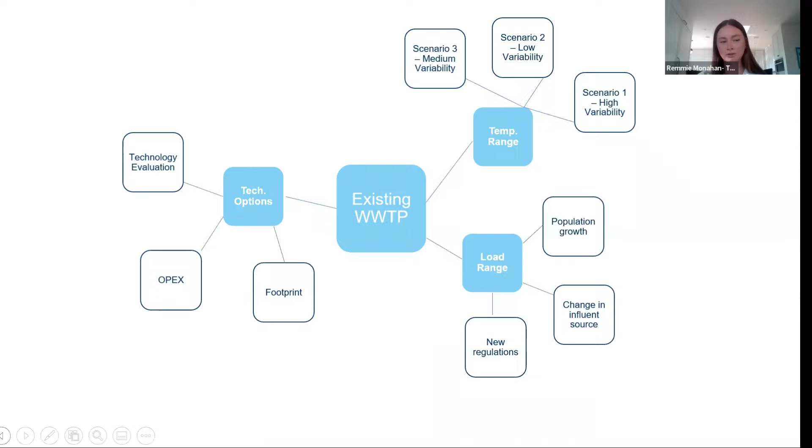But when you look at these even further, when it comes to something like population growth, there are more scenarios. And like I said, there's not enough time, not enough budget to evaluate every single one of these. But if we want to start designing these for a sustainable future, it's really critical that we start to take these into consideration today. So Transcend allows you in a matter of hours to run all these different scenarios in order to then compare and meet your treatment plant goals.

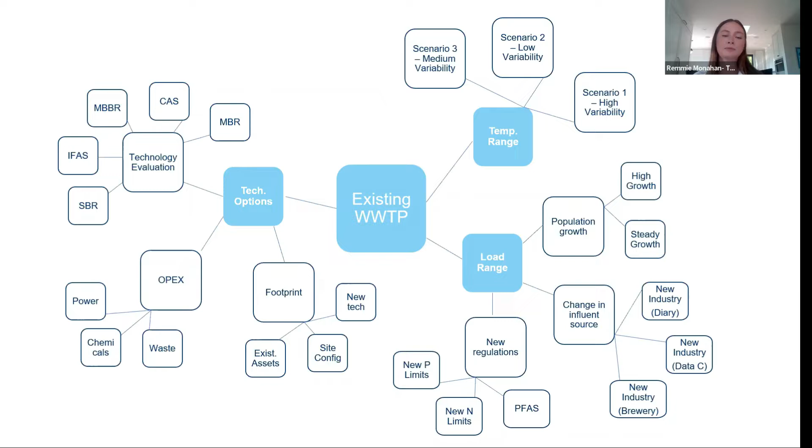So I'm going to kick this now over to Rudi Botha, who is one of our process engineers, and she is going to share with you our tool, give a quick demo, which displays how you can actually run these different evaluations for your treatment plant.

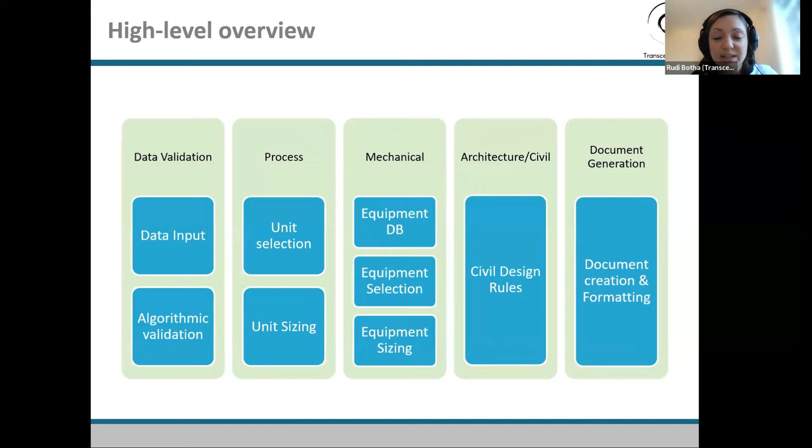Okay, we'll go ahead. Just stop me if there are any questions, or feel free to post them in the chat as we go. So I just wanted to focus on this element of flow variation, as we've spoken about in terms of climate change.

So what is actually going into our wastewater treatment works? Well, this is just a simplification really. We have domestic wastewater, and it varies during the day. So we have this diurnal flow pattern you may be familiar with, and it's quite important to take these peaks into consideration in our designs of wastewater treatment works, for hydraulic purposes of sizing hydraulic units, but also for the aeration demands in the biological systems, if we are using aeration.

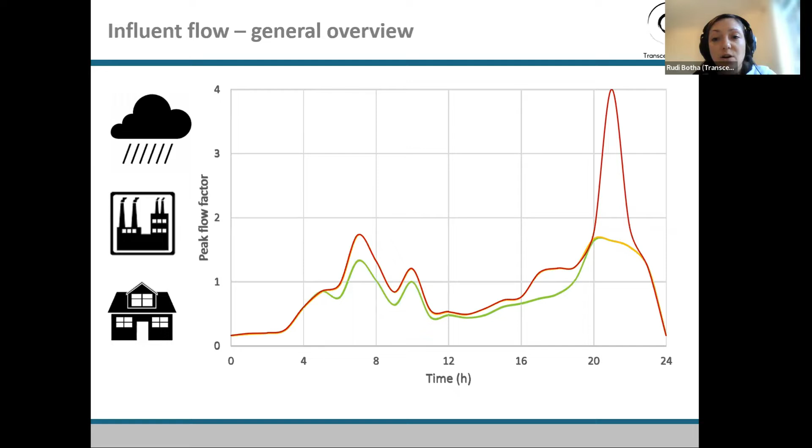And to accommodate those peak amounts, we need to size the equipment to handle that peak. So in domestic wastewater, there may not be significant peaks in a large population, but as we add industrial flows, there may be different peaks overlapping, causing even larger peaks. And then there's also rainfall that can ingress into the sewers. As we spoke about in terms of climate change, we're seeing these rainfall events getting more severe in shorter periods, so we have higher rainfall in a short amount of time. That makes our peak much higher, and we need to start thinking about that in our designs.

So how does the design generator take those peak flows into account? Well, we have many options for you to provide this data. We base a large amount of the design on the design average flow rate, so this is what you choose to design your plant for. Maybe you've projected into the future that you will need a 200 megaliter per day plant. That's our maximum at the moment, but we are looking at expanding it.

You can insert that as your design average flow. So we use that to size the biological system, and produce OPEX results - how much sludge you'll have to dispose of, how much airflow you'll use on average. But then the important thing here is the peak flows. We provide so many different options because everybody has different data. So if you have the peak weekly flow, peak daily flow, or peak hourly flow, you can put that in and we can use it. We provide a space for two different peaks, essentially.

One is for your dry weather - that's when it's not raining - and that influences the wastewater treatment works on a daily basis. So that's what we call peak dry weather flow, and we use that to create the diurnal flow pattern we just saw, as well as to size the blowers for peak airflow.

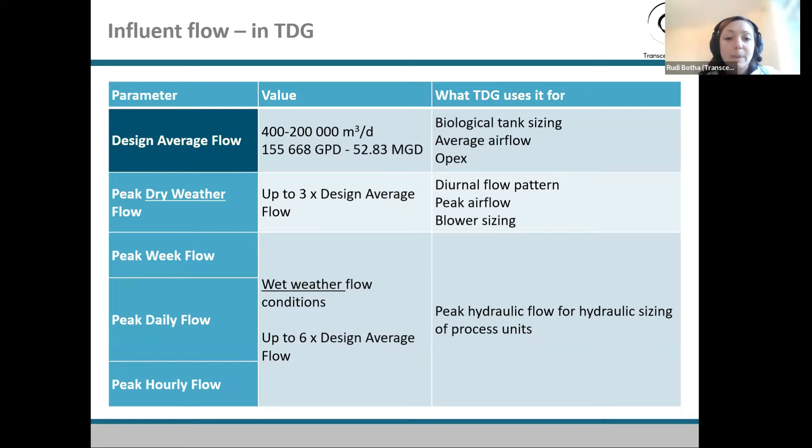As we're working on a preliminary level, sometimes we don't have all of this data. What's great about the design generator is we try to help you out with whatever data you don't have. There are only a few values you have to fill in, and these peak flows are not one of them. If you don't have any peak flow data, that's all right - we take an estimate of your biological oxygen demand in the influent and your average design flow. From a large flow we can estimate you may be accommodating a high population, with lower peaks, or if you have a very small flow, a small population, therefore quite high peaks.

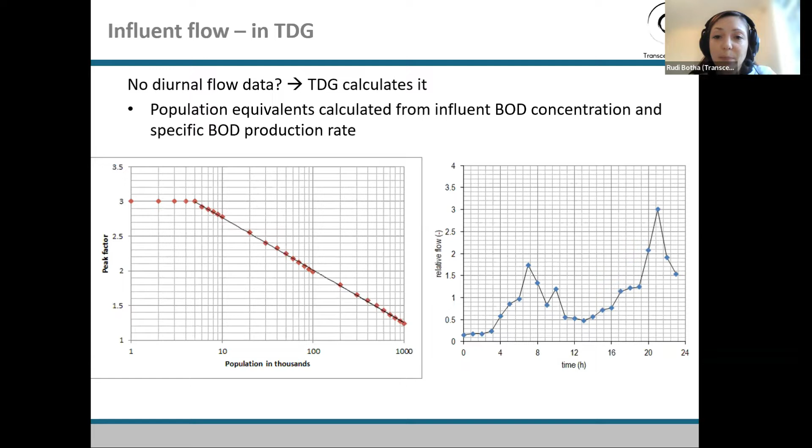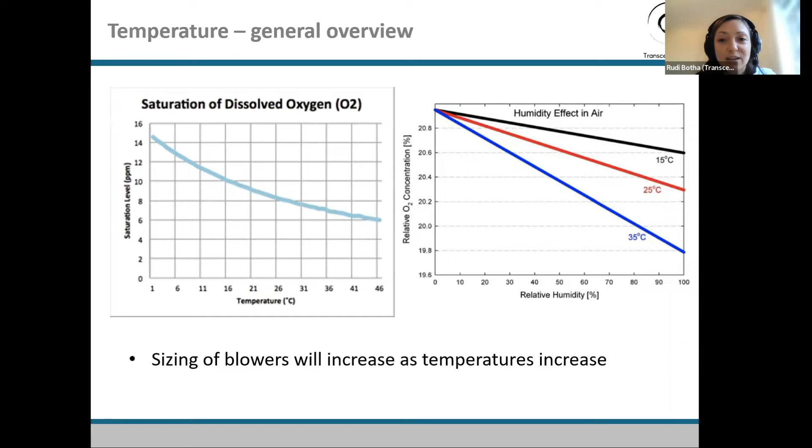So that was just a bit of background on the technical elements I'm going to highlight in the model. There's a lot in the model, so it's difficult to touch on it all, but as we're focusing on climate change today, I thought I'd mention these in particular.

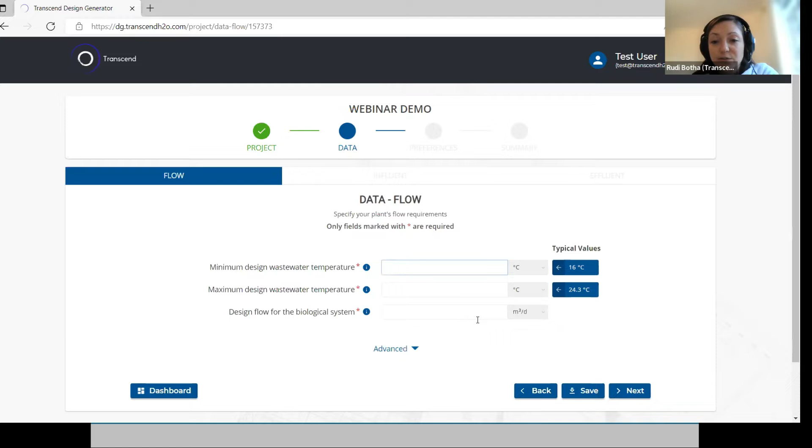So the next item here is your input data. We have flow, influent, and effluent inputs. With the flows, we only have to include temperatures and average flow. But if there is interest in exploring peak flows, as we've been discussing, here you can really specify. We also provide typical values.

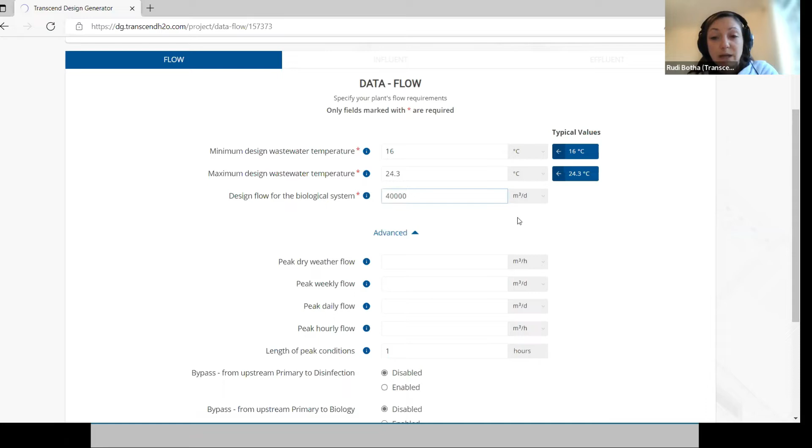These are linked to your region, so these are typical for South Africa, and I'm going to use these values. For our average flow, I'm going to use a plant of, let's say, 40 megaliters per day. Now I can include any peak flows I need. Quite common peak flow is about double the average flow in a diurnal pattern. This is what's common for my area, might be different for yours.

Here we can choose one of the wet flow peaks, so you don't have to include them all. If you do have them all, that's great — whichever one you insert will be used. So let's say, for example, on a rainy day we get quite a lot of rain, and it might be about 4 times your average flow.

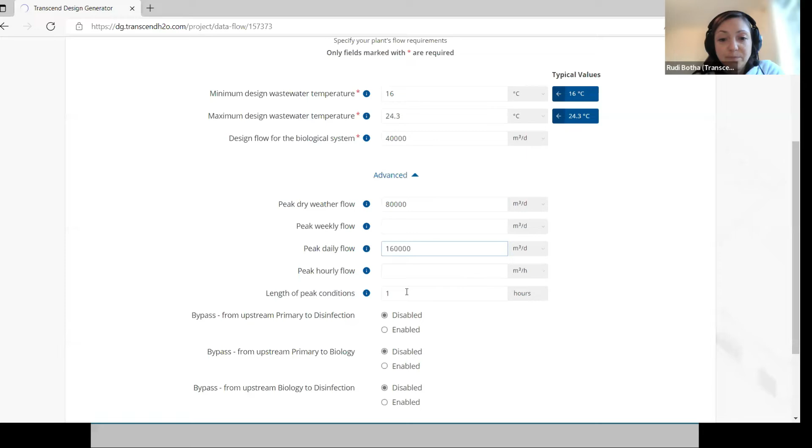Another interesting feature that I'm going to go into more detail on, and it's very helpful in climate events such as high rainfall, is a bypass system. This allows you to bypass your flow from 3 different points in the wastewater treatment works. You might be asking why you'd want to use something like this — well, it's actually used in Cape Town, where I live. One of the wastewater treatment works has been surrounded by city, as it was built a very long time ago, and there's no longer space to expand it.

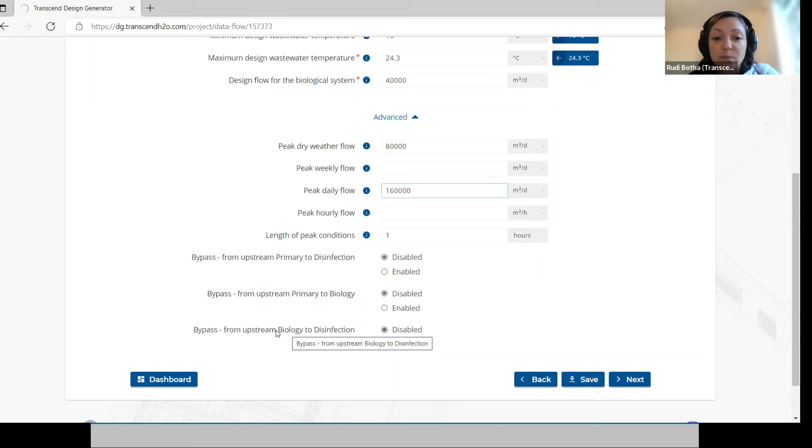So they've created a bypass to a wastewater treatment works further out of the city, where they only use primary treatment and bypass all of the main biology and disinfection, sending the treatment out to a second wastewater treatment works. So this is the example we have here: we're going to send it through primary treatment, but bypass main biology and disinfection.

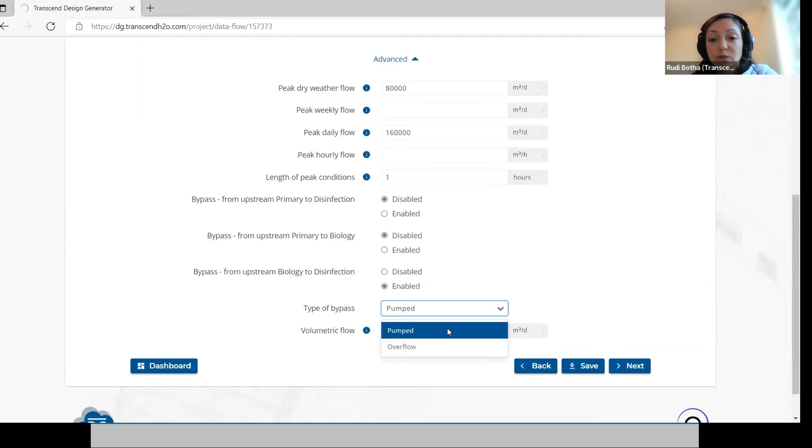I'll include that here. You can use either a pumped bypass or an overflow. If you include pumped, whatever value you put in here will be the fixed value that you're bypassing. If you choose overflow, you'll keep this amount, and anything more than this amount will be bypassed. So let's, for example, use 70 megaliters per day, 70,000 cubics per day, and anything more than that will be bypassed from the secondary to the disinfection.

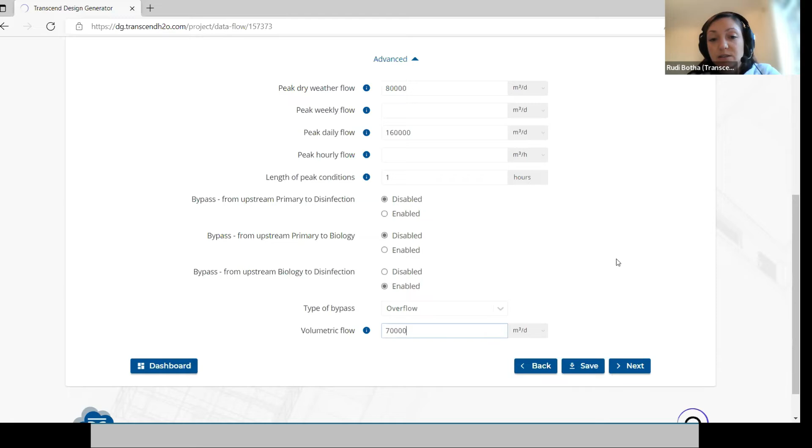Just going to pause a little bit here. This is quite an interesting concept. I don't know if there are any specific questions on this.

We have a question in the chat: from your experience, which is more power consuming for air blowers, in conventional activated sludge or an extended aeration system?

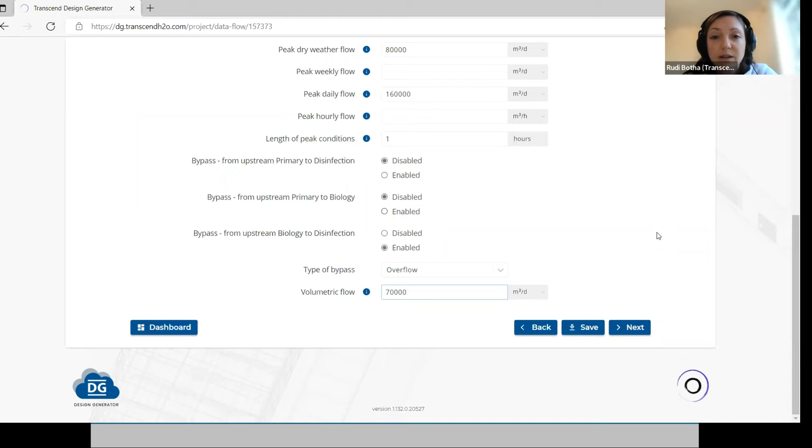I think the extended aeration is likely to use more power. You're using a very long sludge age, so it's breaking down particulate matter that takes a very long time to break down. But we could test it in the system and have a look. It depends on a number of factors—you'd need to compare it, keeping everything else the same. Of course, thank you.

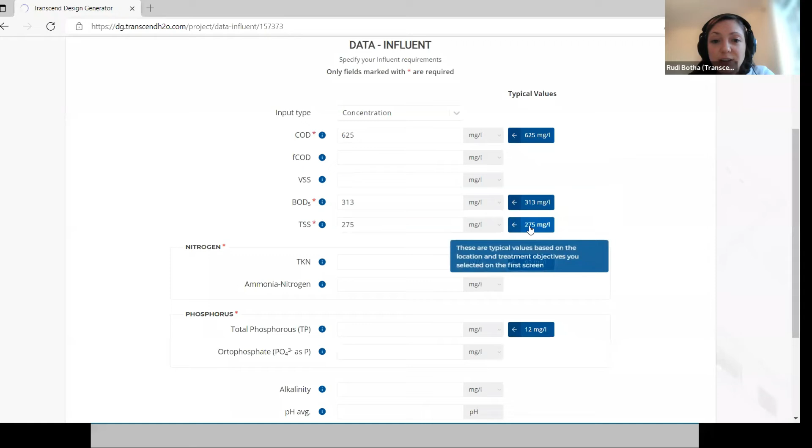So to save those results, I'm clicking next onto the next page here, and here is the influent flow data. The red stars indicate the ones we have to include, and I'm going to use these typical values from the region. Of course, instead of using TKN, you could choose to provide ammonia instead, or as well, if you have the data available. If you don't, we'll create a calculation in the background to estimate it.

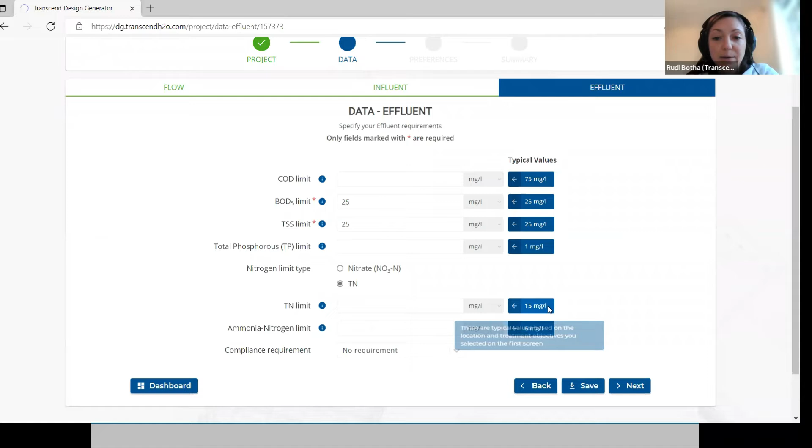Next, we're on to the effluent limits. These required ones I will fill in. If you have more effluent limits you'd like to specify, you can include them—just for example, I'll include the TN as well, and phosphorus. And here you can choose your compliance requirements, so if your compliance is on a monthly average or daily average basis, you can indicate that here.

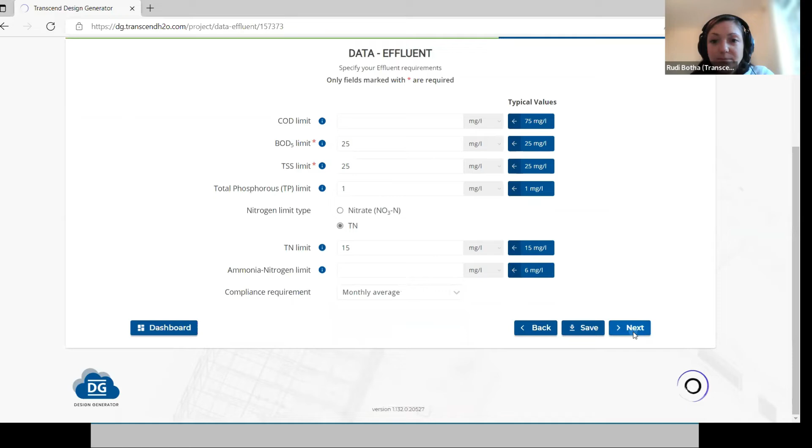Now we go to the preferences. This is where you choose which components of the process you'd like in your treatment plant. There are options to let the calculation decide, for example for grit removal and flow equalization. If you select that option for flow equalization, when there's a very high peak it will provide flow equalization to balance the size of the other downstream units. Or if you specifically want flow equalization, you can override and say, no matter what the peak is, you want flow equalization.

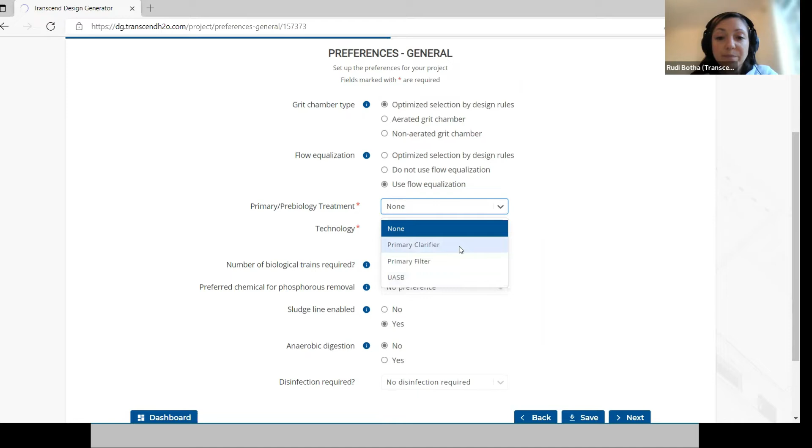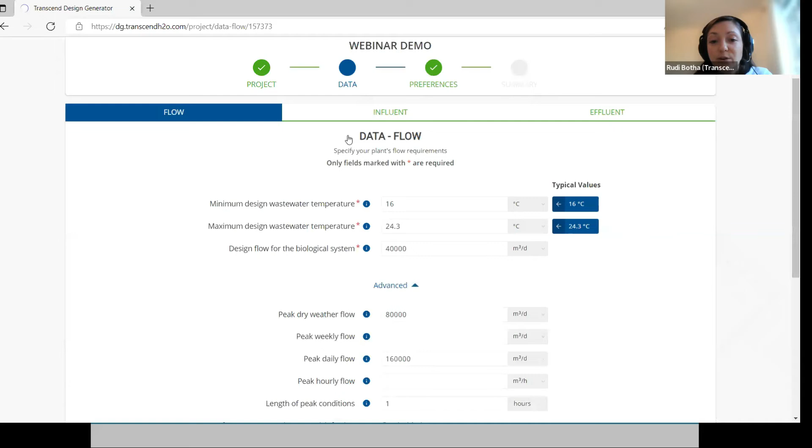You can also choose your primary treatment—there are primary clarifiers, filters, and an upflow anaerobic sludge blanket reactor. For example, I'm just clicking a primary clarifier. The technologies offered here are the CAS and the SBR, and the reason there are only two is because we chose a bypass—the bypass is only available for these two technologies. But if you'd like a different technology, you can always go back. So let's go back to our data and remove our bypass, then remember to click next, as it saves your data.

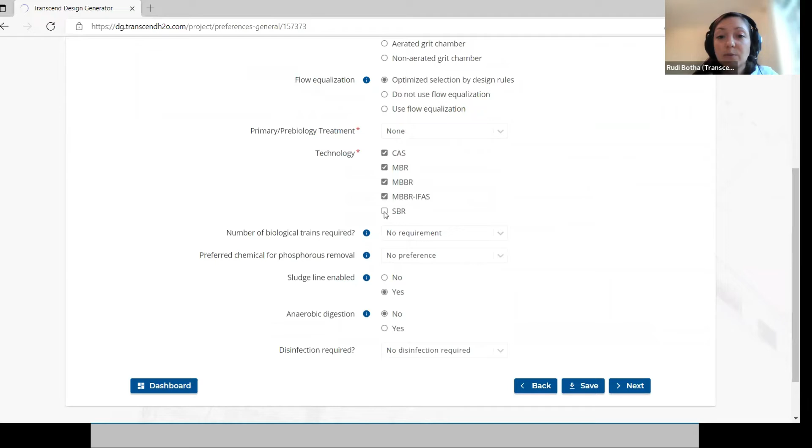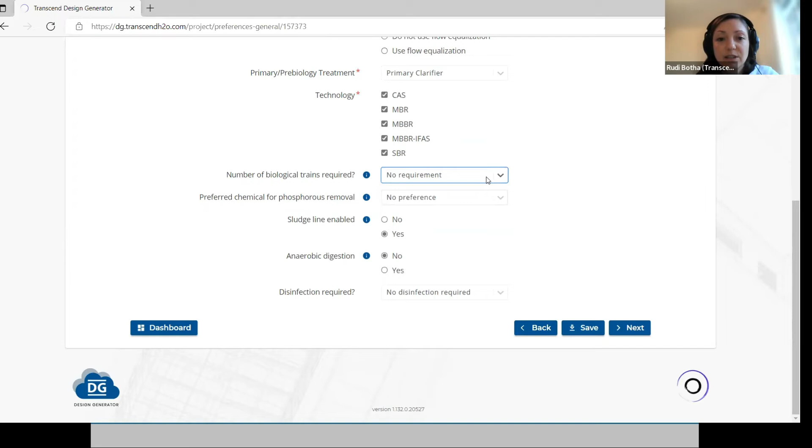We can head back to our preferences, and now you'll see a number of technologies available. You can choose more than one, and they'll produce a set of outputs for each of these main biologies. So we can run the model and compare how it looks with a conventional activated sludge system versus an MBR, MBBR, IFAS, or SBR system. Just reselecting my primary clarifier there. If you have a specific number of trains you'd like for the biology, you can choose that. If you have a preference for chemical removal, you can indicate that, and you can choose whether to include the sludge line, an anaerobic digester, and disinfection.

Are there any questions there, Remy? Yes, one in the chat: since we're focused on climate change today, have you noticed any trend of increasing or decreasing effluent wastewater temperature? I haven't personally, but I think it would be highly likely to occur, especially as our summers get hotter. So I think it's very likely, though I haven't seen any specific examples. Thank you.

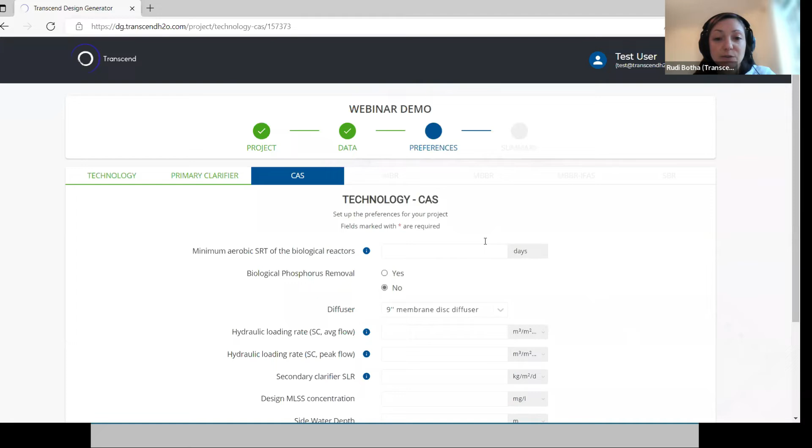So for example, for the activated sludge, we can choose a minimum aerobic sludge retention time. We could also choose whether we'd like biological phosphorus removal, and let's, for example, include that.

We can then also choose a particular configuration—I'm going to choose the UCT configuration, I'm familiar with this one. We can specify some parameters associated with clarifiers, as well as mixed liquor suspended solids concentration, or the side water depth. So if you'd like a really deep reactor or a very shallow one, if you're planning on using surface aeration for example, you can specify that here. So let's, for example, use quite a shallow reactor.

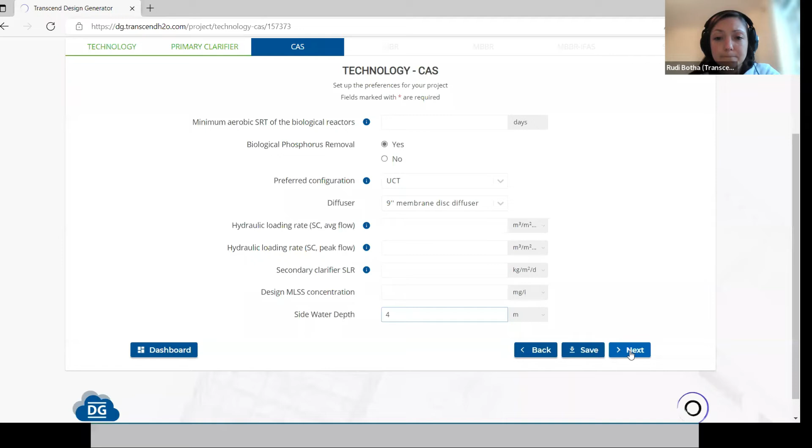The same can be applied for all the different technologies. If you'd like to specify something specific, you can, but most of these inputs are not required, and so you could just click through to use the default values, which are industry standards.

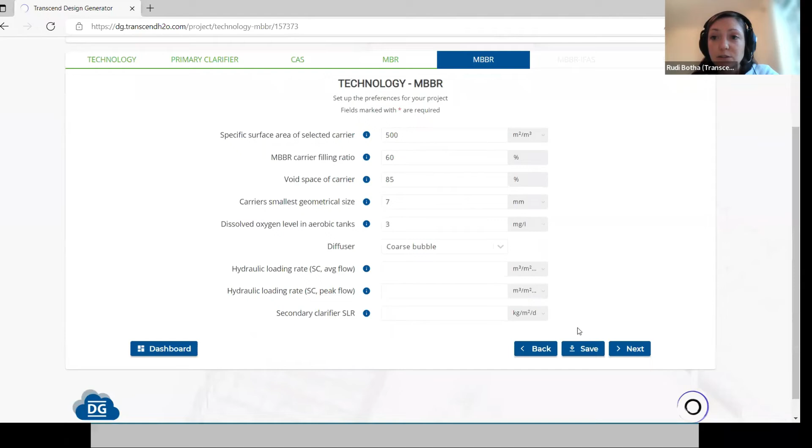And that's it. You've provided your data and chosen your preferences. And then all that's left is to run the design.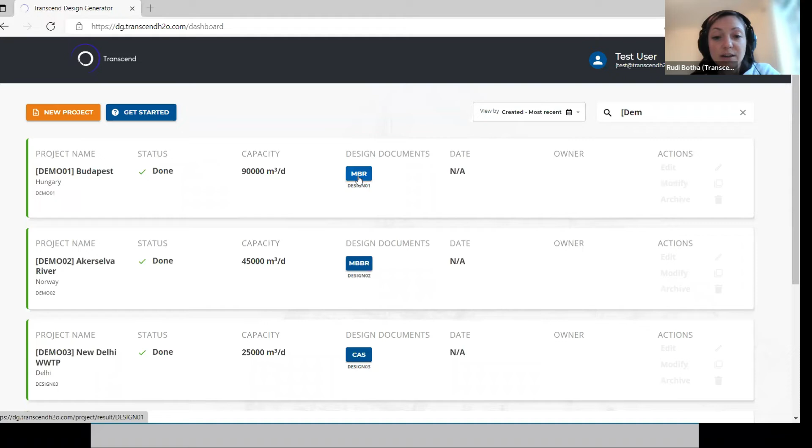So this one's running at the moment, but if we have a look at one that's already finished, it'll look like this blue MBR here, and you would be able to click on this icon and see all the output documents over here, where you can view them in the browser. You can download PDFs, and download editables is also available if you have a subscription.

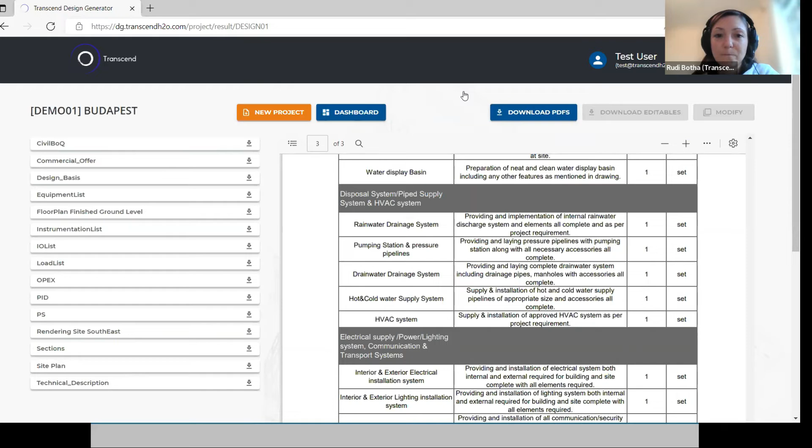So I'm just going to take you through a few of these output documents.

All right, Rudy, as you're pulling those up, we actually have a few questions. Does one have a chance to vary the settling SVI by season to see if the settling is okay throughout the year? Or maybe we have to use the worst case scenario?

So that is varied throughout the year. As I mentioned at the beginning, we do a dynamic simulation as well, and that is varying a couple of values over an entire year or more than a year's simulation. Those values that are varied are the temperature and the SVI. So it is varied throughout the year through the seasons, as would be normal for a seasonal flow.

Thank you. And the other one actually had to do with SVI as well. Hani, please let me know if that answered your question, and then we should be good to go, Rudy. Great.

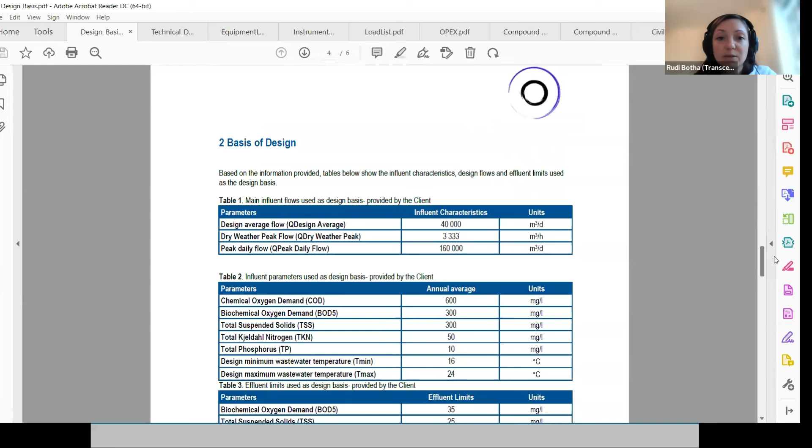So these are some of the output documents that you'll find. The design basis is just a summary of the inputs and assumptions we've made in the model. So these are the influent flows, influent concentrations, effluent parameters, and in the design, if there are any characteristics we didn't include, for example we didn't specify orthophosphate, but that's been calculated in the background, it will then list that here.

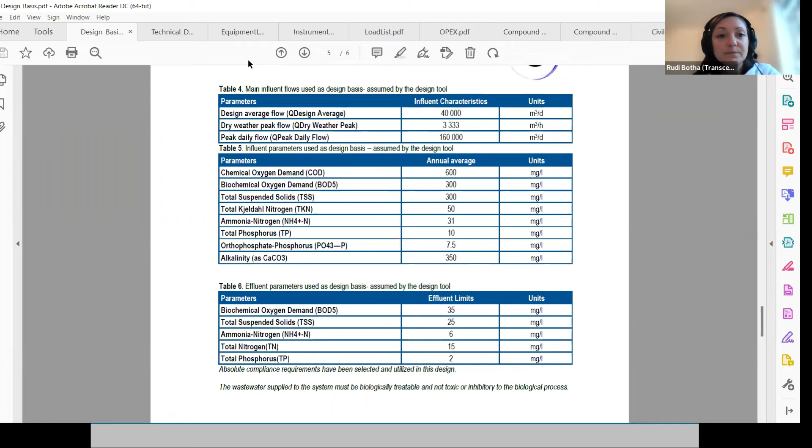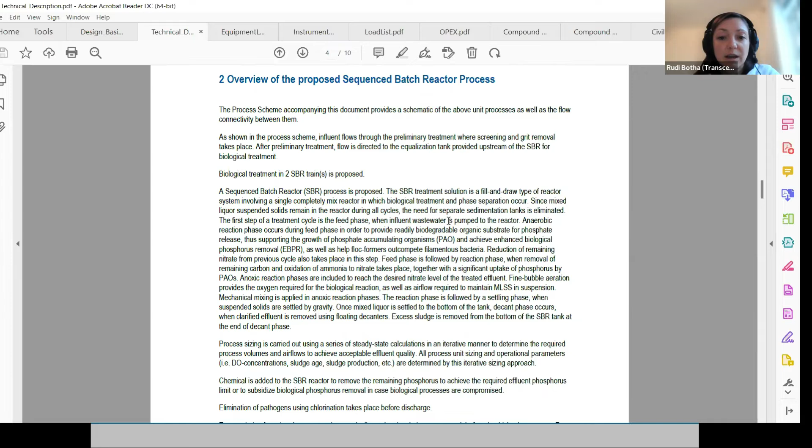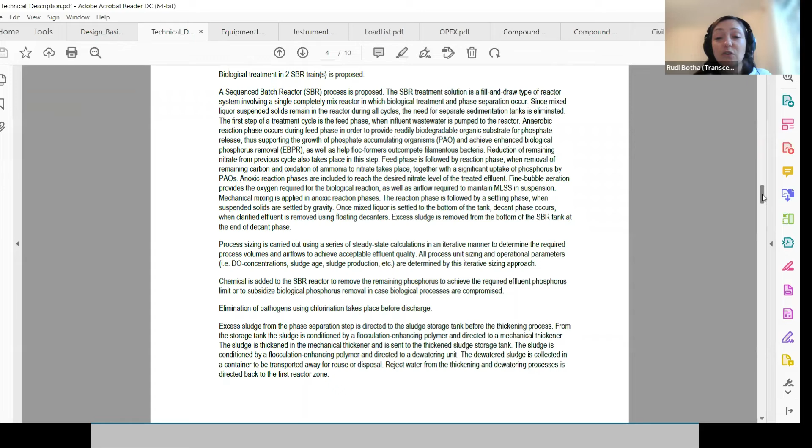And then the next document, the technical description, one of my favorites, is really the comprehensive description of all the preferences we've chosen and the design parameters associated with each process unit. So there's an introduction. It actually gives you a description of where the flow is going, through which process units, if it's being diverted, bypassed, what is happening in the sequencing batch reactor, for example, whether there's biological phosphorus removal, etc. So that's quite a helpful document that you don't then have to, as a process engineer, write for each and every design that you would like to run.

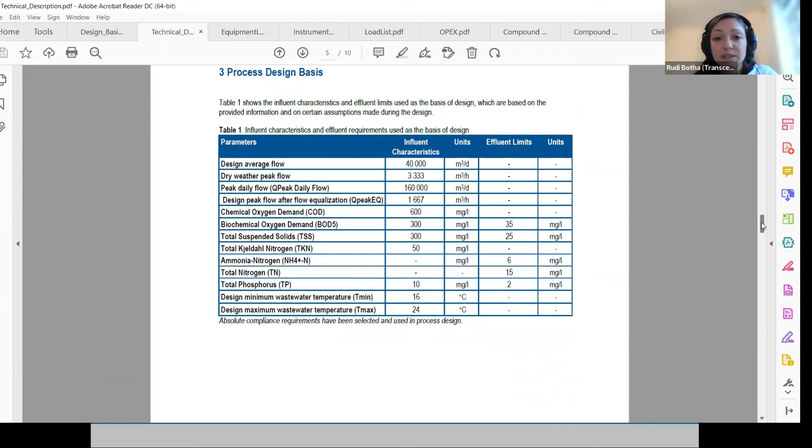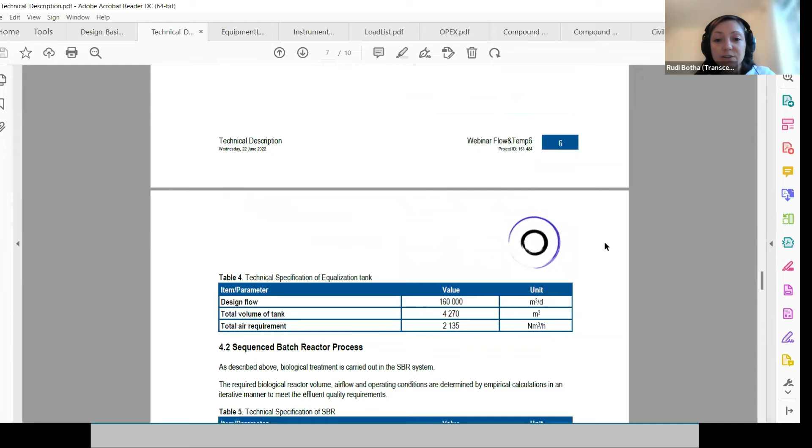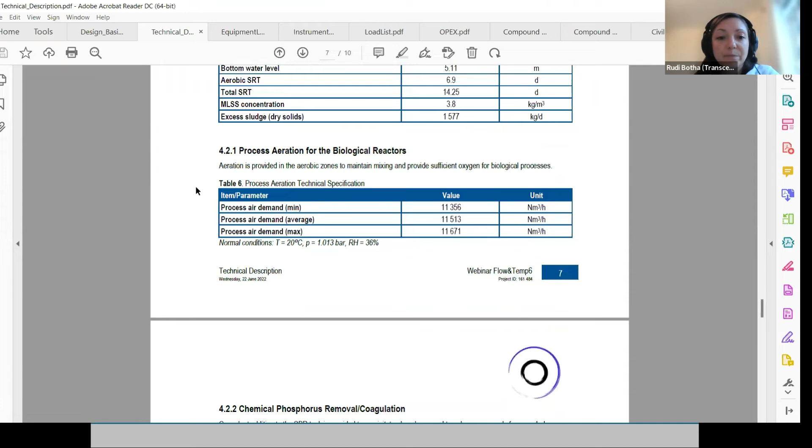There's a quick description, summary of the basis of design, so just influent and effluent limits, and then quite a lot of detail on screening, grit removal, equalization tanks, your reactor and sizing of the reactor, and exactly the flow pattern. For this example, it's a sequencing batch reactor, and the aeration demand, any chemical phosphorus removal, disinfection, sludge management. The whole design of the plant is listed here.

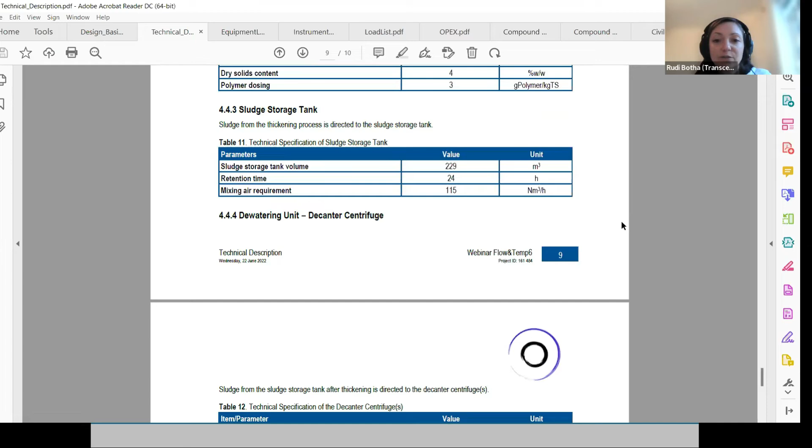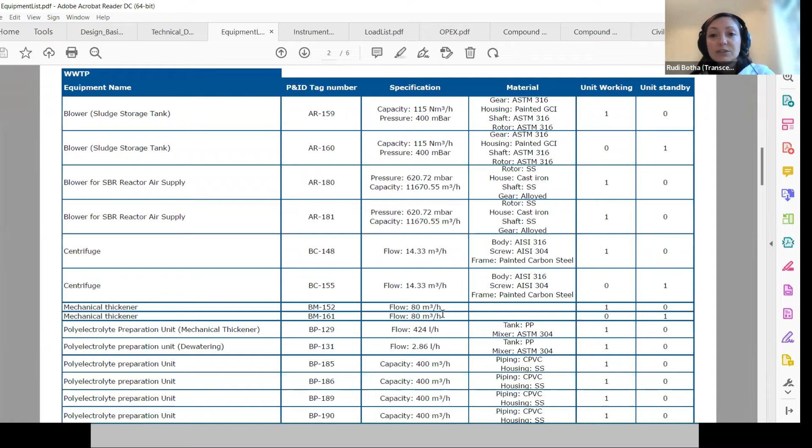Next, we have an equipment list. So this lists all the equipment that's required in the plant. It provides a bit of detail and specification and the material type, any duty or standby units. So that's very helpful in terms of CapEx and sizing.

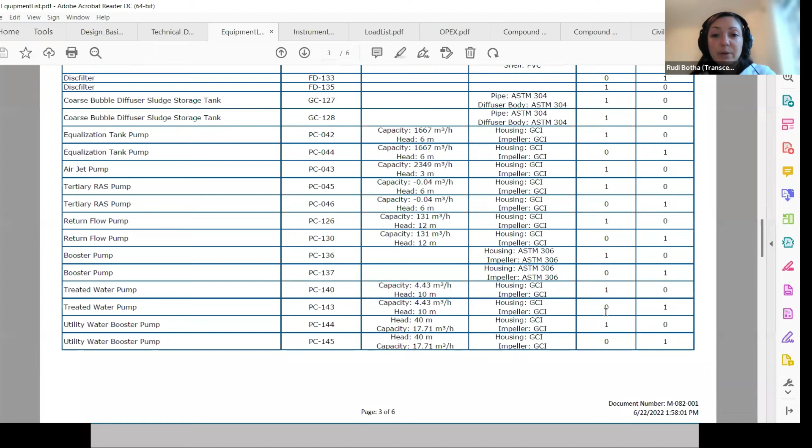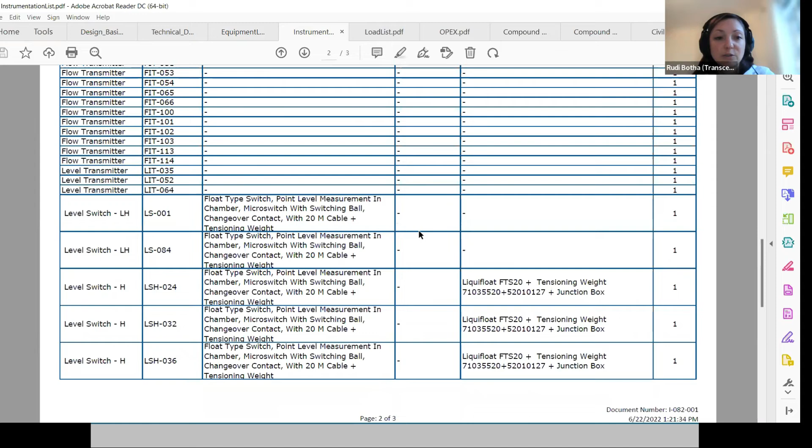We also have an instrumentation list. So these are the online monitoring units, level switches and transmitters, with a bit of specification detail as well. There's a load list to indicate the power consumption, installed power, and average daily consumed power of each of the pieces of equipment.

We have an OPEX table, which nicely summarizes any of the outputs, so electricity consumption, chemicals, waste disposal, and then these can easily be taken into an analysis of which option to choose going forward.

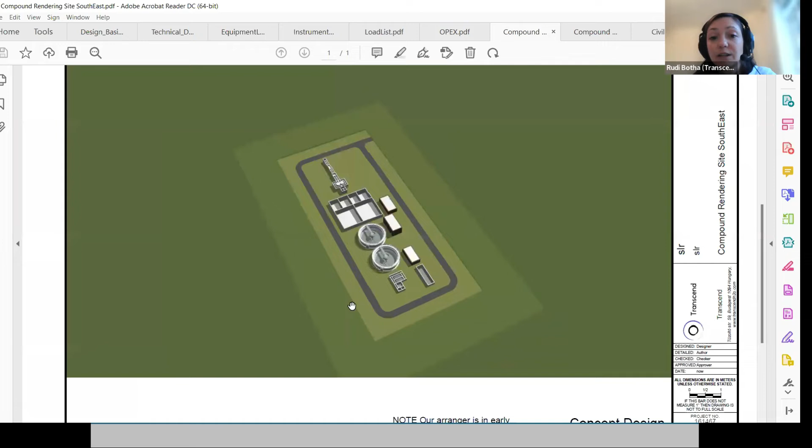In terms of the civil documents, this is the 3D rendering that is an output document in Revit. And so each of these structures could then be changed, and you could rearrange them if you're not happy with the layout.

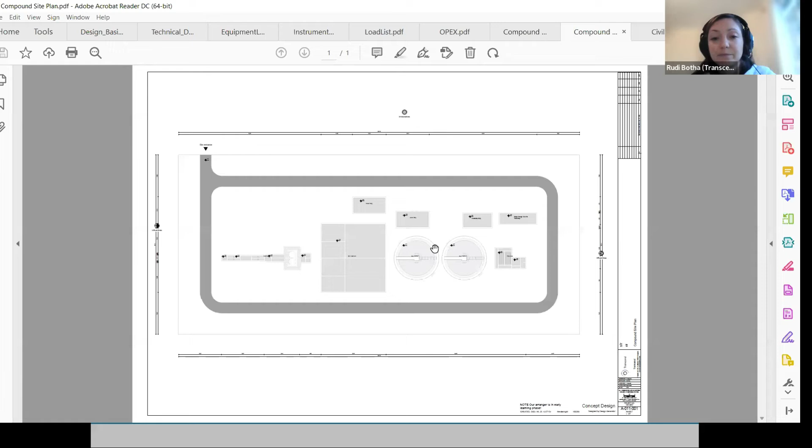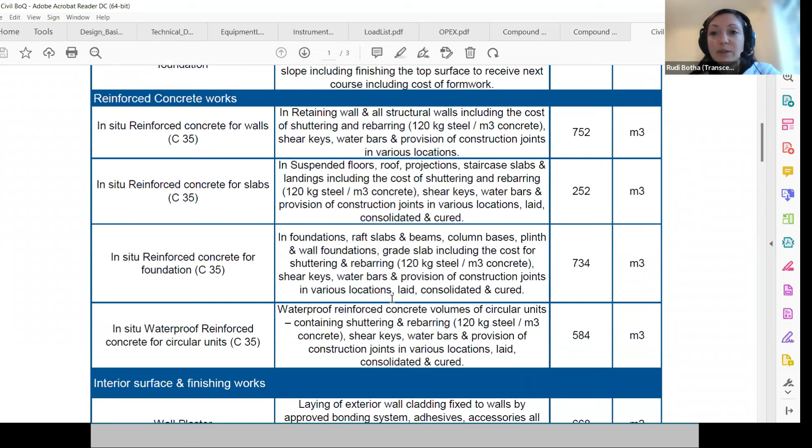This is also provided in a site layout format. And there's also a very short bill of quantities. It's a summary of all the capital requirements in terms of civil structures.

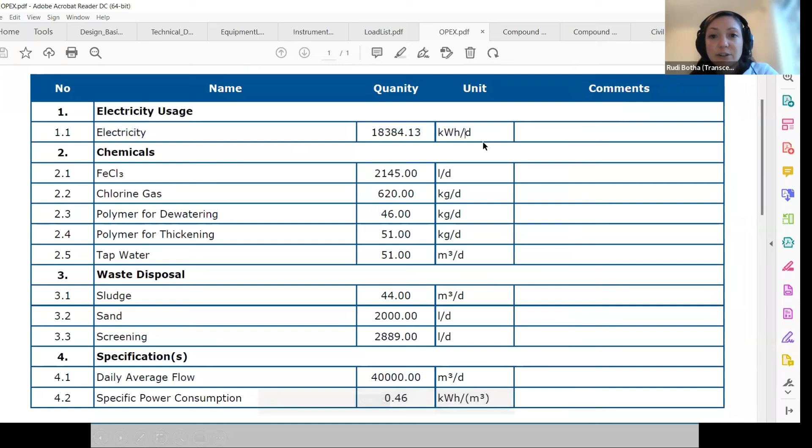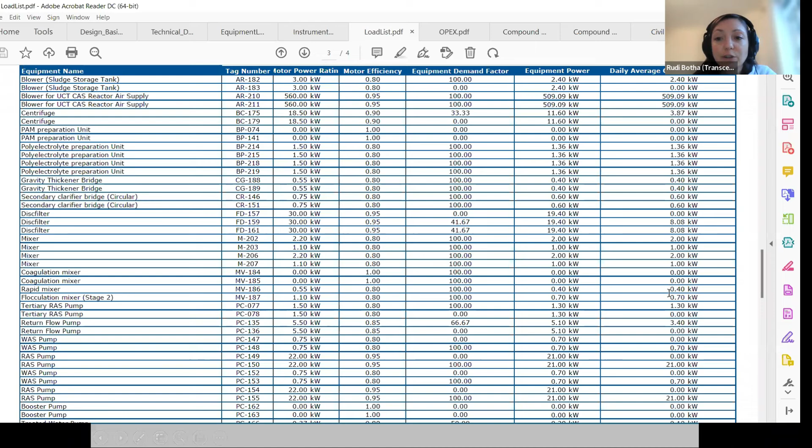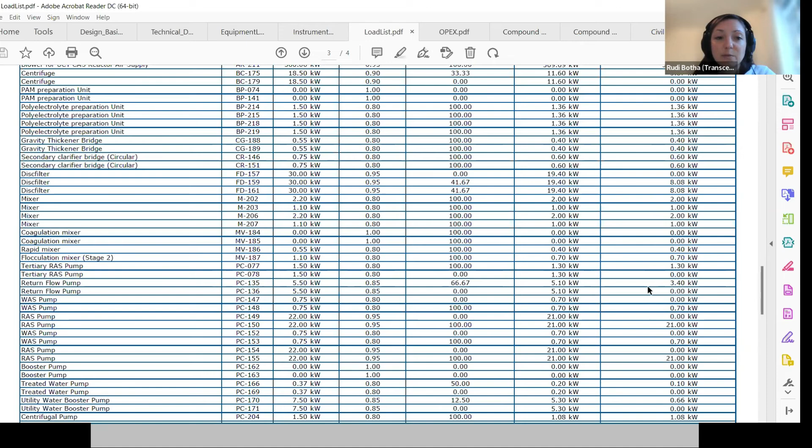Okay, thank you. And does the process summary give a total energy consumption for the design? Yes, so our OPEX summary, as I showed briefly, I'll go back there quickly. There is a total electricity consumption per day, and this is on average consumption. If you have a look at the load list, you could have a breakdown of that as well - the average consumed power for each unit, as well as the installed power. This, of course, takes into account duty standby, so we won't be consuming power from all our process units all the time. Some are there on standby to be the backup. I hope that answered the questions.

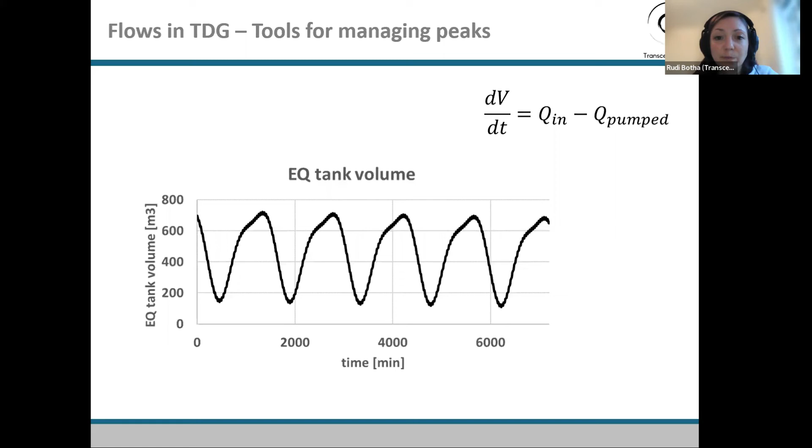So we spoke about the equalization tank. What does that essentially mean? It's a holding tank that's balancing out that diurnal flow peak that we saw earlier in the presentation. The volume of this tank handles a variable influent flow, according to that diurnal flow, but a consistent flow is pumped out to the downstream process units. So this tank's volume is going to change daily through this pattern, but it means that all your downstream process units can benefit from the consistent flow being pumped out. That helps to protect against a peak energy consumption in your blowers, airflow, or aeration units. It can then also reduce the sizing of those units, which is also helpful from a capital cost point of view. Another example that I mentioned in the demonstration that I wanted to show in more detail was the bypass tool that we've added recently.

There are three options for this bypass. You could take it from before the primary treatment all the way through to disinfection. You would do this, for example, if you have a really big rainfall - this is your one day of the year where it rains so much that your wastewater treatment works can't actually manage the flow. I think this happens in a lot of cases. There's always that one day or one hour, and bypasses are often installed, so this is an example of that. At least then you're still sizing your disinfection for the treatment of that ultimate peak flow, and not letting it discharge without any disinfection.

But effluent limits and environmental impact limits are getting stricter, and in many situations now, it is mandatory to at least provide primary treatment in those situations of ultimate peaks. So then maybe bypass option number 3 would be more applicable, where you're designing your primary system for that peak flow and maybe bypassing it just before the main biology or secondary treatment out to disinfection. We've included bypass option number 2 as well for other situations. What you can also do with this bypass is run two parallel plants - maybe half the plant is treated with a conventional activated sludge and half the plant is a membrane bioreactor, and you'd like to model how to upgrade both of them. You could use these bypasses and model the plants separately, then combine the projects afterwards. So this bypass adds a lot of flexibility in terms of design in the Transcend design generator.

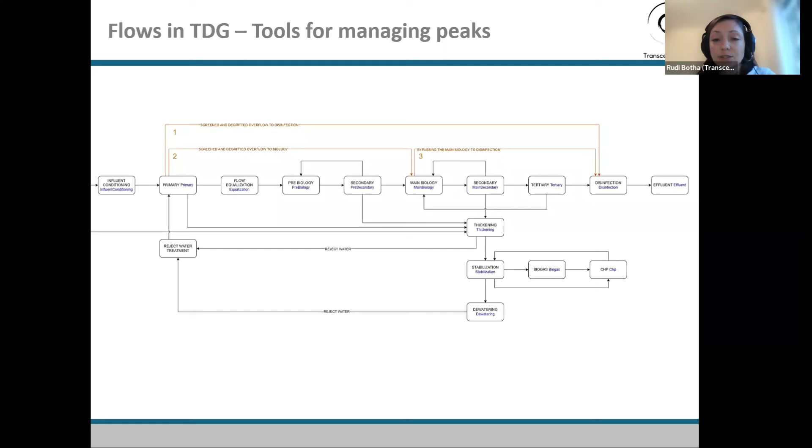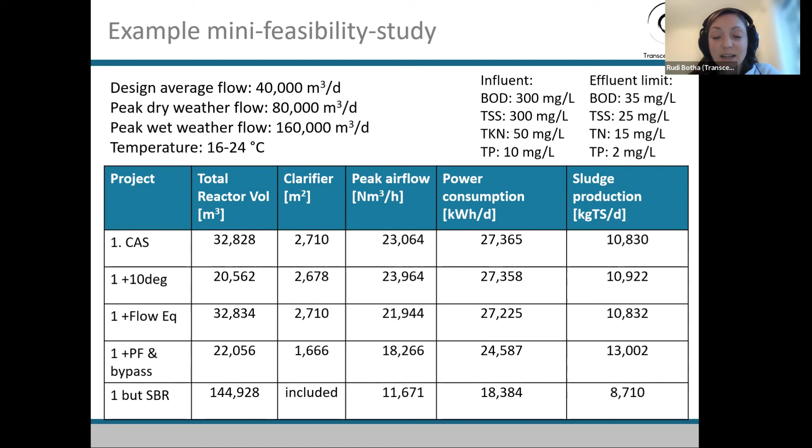The reject water is, if you don't include the sludge treatment as a design step in the tool, then you can specify what reject water is coming from your sludge treatment. Maybe you have your own sludge treatment already and you don't want that to be considered. It is still important in the design of your treatment plant to consider any supernatant. That's what we call it in South Africa, but reject water may be more common, and that will return into your treatment system.